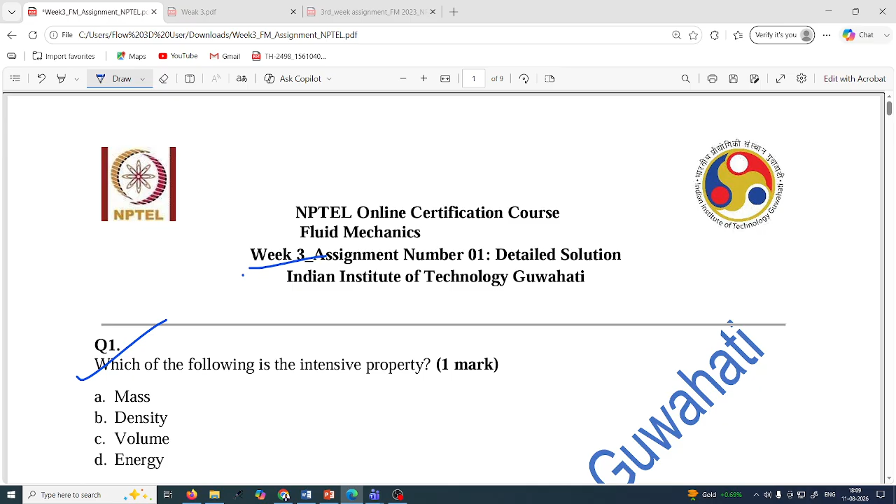So now let us move with the week 3. Question 1 is, which of the following is an intensive property? Option A: mass, density, volume and energy. So you have 4 options. Please just try to write your answer in the chat box.

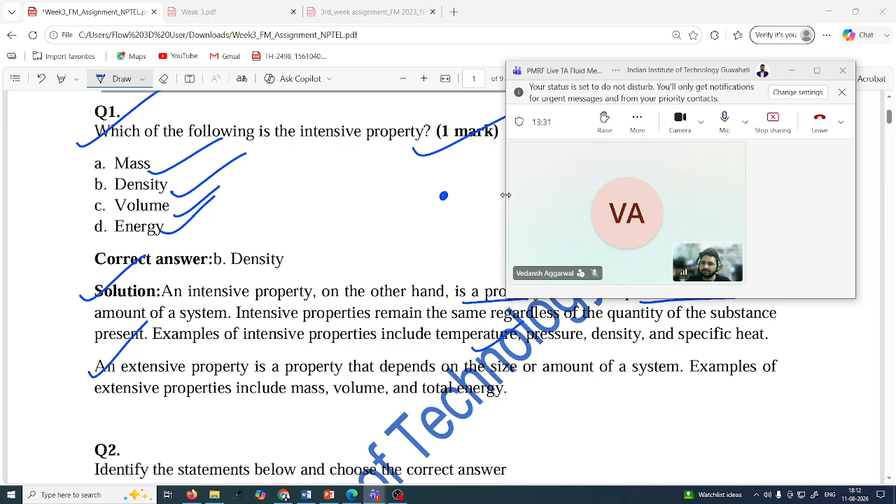Yes, so the next question is for 1 mark. Identify the statement below and choose the correct answer. Here you have two statements. Statement A: Reynolds transport theorem provides a link between system approach and control volume approach. Statement B: a control volume focuses on a region of space.

So here you have the code: Option A, A and B are true. Option B, A is false and B is true. Option C, A and B are false. Option D, none of them. So you have four options. Please just try to understand the question, read very carefully, and try to write your answer in the chat box.

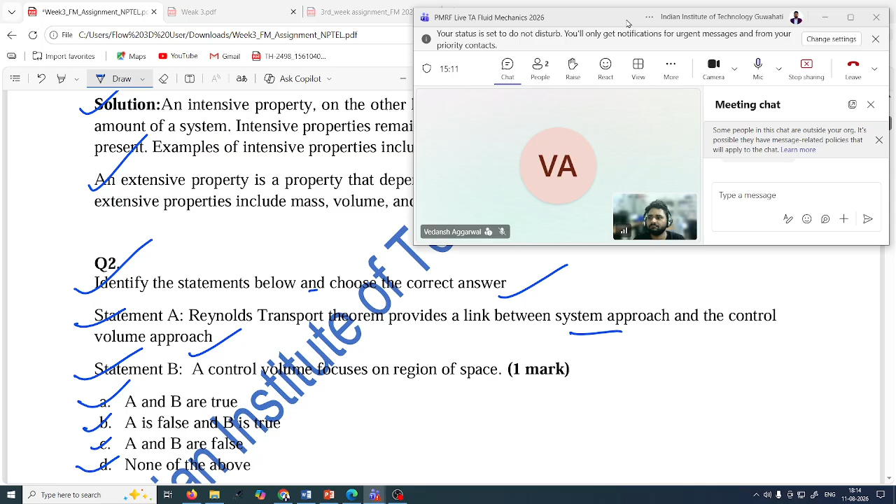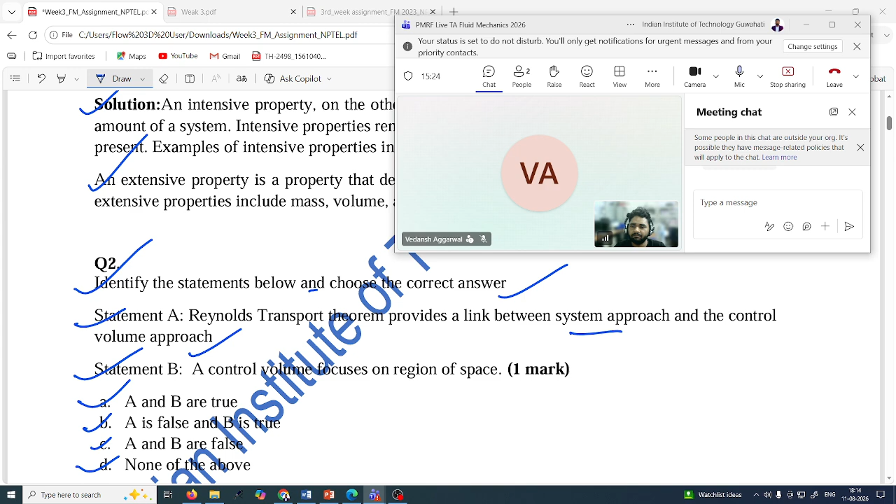Okay, okay, it is not visible. No, it might be visible. Oh, why it is not? Let me just open the chat. Just type again, please, let me just see. Just type, what is the problem? The problem should not be like that. Just type, please.

Have you typed or not? Oh, but it is not visible from my side. Okay, okay, that's fine, but I am just checking why it is not visible, because this is maybe a technical error issue, so I'll just... yeah, it is visible, I think when I am typing it is visible. Oh, your option is also visible.

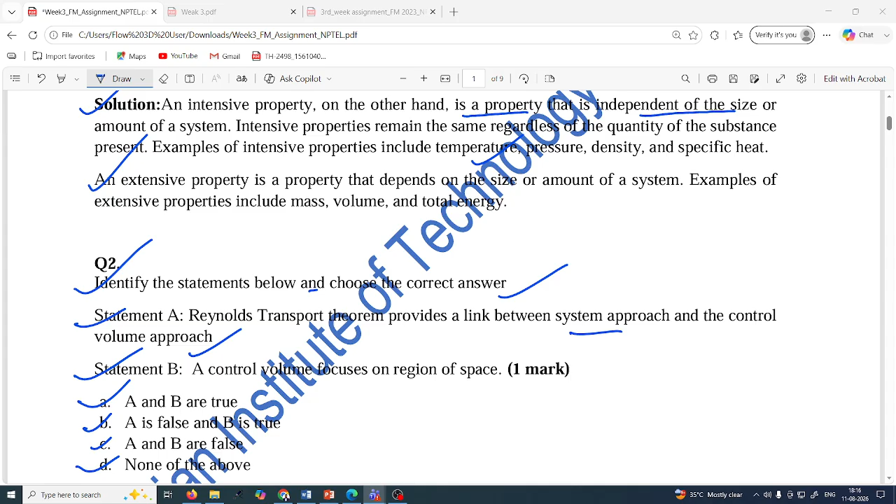A and B are true. It is visible, hope I think you are able to see now. A and B are true. Okay, okay, so actually I have two screens, one for the question and another for this link. Okay, so yes, option A is correct. That is good.

So what is actually the Reynolds transport theorem? It provides the necessary link between the system approach of following a set of particles and the control volume approach, analyzing the flow through a defined region of space.

Additionally, a control volume does focus on a specific region of space where the flow can flow in and out. So I want to explain a little bit about the control volume approach versus the system approach. The system approach means the Lagrangian approach. Let me explain with a simple example of a river.

If you are going to measure the flow velocity in the river, you have two devices. One is a floating device for velocity measurement, and another is a fixed one, meaning this device can be fixed at a place and you can measure the velocity.

When you measure fluid velocity using the system approach, you are tracking a set of particles, the same particle, wherever it reaches. When you put your floating device in, it will flow with the fluid velocity, keeping in touch with the same fluid particle. As water flows downstream, your floating device flows downstream too. This means you are measuring velocity using the system approach.

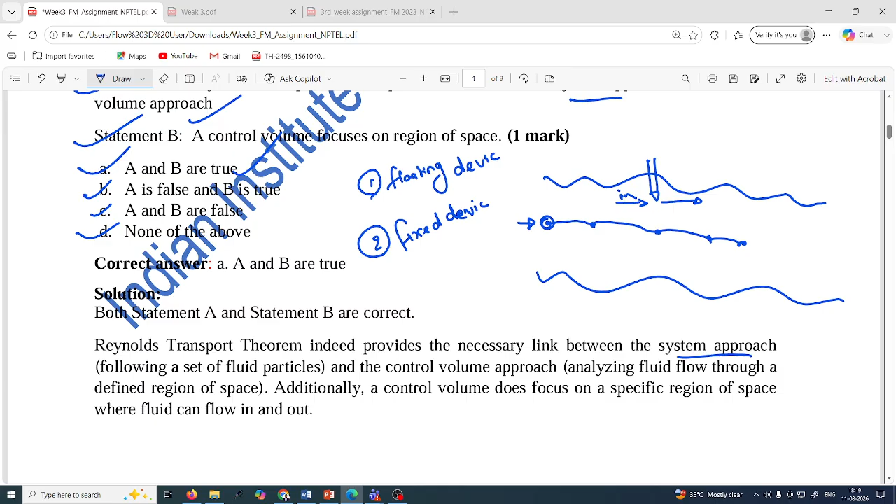This is a very conceptual question, so remember it, please, because based on this concept you can get questions in the final NPTEL exam or your assignment. Now let us move on to question number 3.

Question number 3 is: identify the statement below.

Hello, Rajkumar, yes, no, I think Rajkumar has opened... just please unmute, please mute your voice, Rajkumar. Just mute your mic, please. I think let me... yes, I am able to. Okay, I have muted the mic of Rajkumar.

Now let us move on to the question. Question 3 is: identify the statement below and choose the correct answer. Statement A: a control volume focuses on a set of fluid particles. Statement B: a control volume can be fixed, movable, or deformable. So you have these options.

Please try to write your answer in the chat box for question number 3. So for question number 3, you are telling option A is false and B is true. Okay, let me just see.

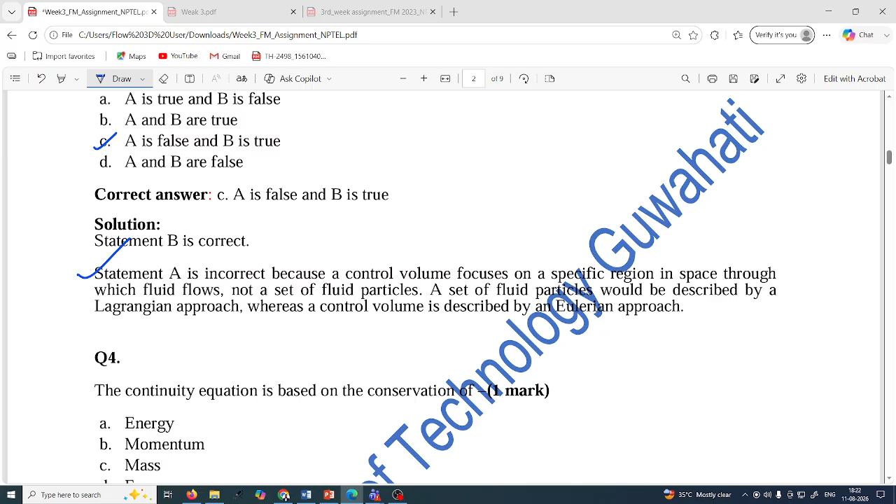Now let us move on to the next question, question number 4. The continuity equation is based on the conservation of energy, momentum, mass, and force.

This is a very easy question, but I need the answer from your side, please. Everyone please write your answer in the chat box: the continuity equation is based on the conservation of whether it is energy, momentum, mass, or force. Okay, you are telling mass will be correct. I will not take much time here; that will be mass.

So the explanation: the continuity equation is based on the conservation of mass, which is a fundamental principle in physics, stating that mass cannot be created nor destroyed within a closed system. The continuity equation is particularly important in fluid dynamics and describes how the mass of the fluid remains constant as it flows through a given volume. I hope you understand. Now let us move on to the next question.

This one is a little bit calculative. Question 5: water enters a nozzle with a velocity of 5 meters per second and exits with a velocity of 15 meters per second, remember 3 times more. The mass flow rate of the water is 10 kg per second. What is the force exerted by the water on the nozzle? So here you need to calculate the force exerted by water on the nozzle.

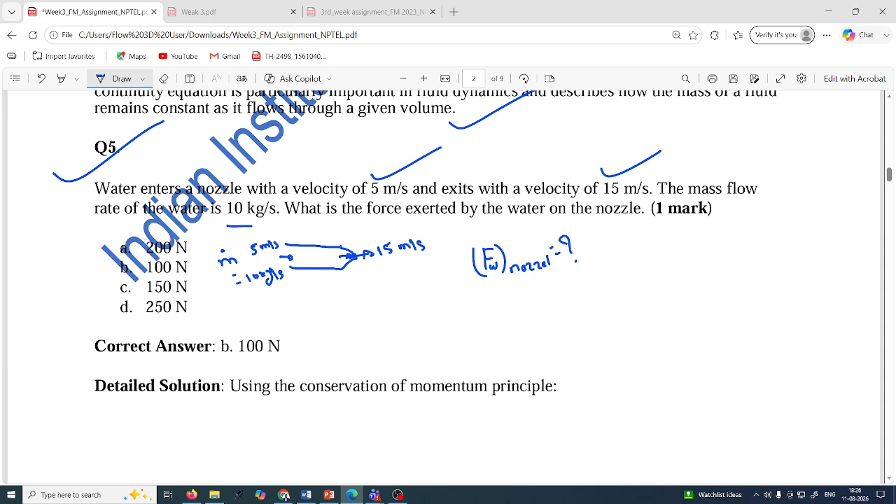Now very simple one, that will be 100 Newton. So you are correct. Using the conservation of momentum principle, the force is equal to the rate of mass into V2 minus V1. So this will be 10 into, sorry, not 20, the value is 15 and 5. So 15 minus 5, 10 into 10, finally 100 Newton. So very easy question, but conceptual. Remember please.

Now let us move on to question number 6. Consider a steady incompressible flow through a converging nozzle. If the cross-sectional area at the inlet is A1 and outlet is A2, with A2 less than A1, and the velocity at the inlet is V1, what is the velocity at outlet V2? Remember, the condition given is steady incompressible flow. Please just try to write your answer, which option will be correct: A, B, C or D.

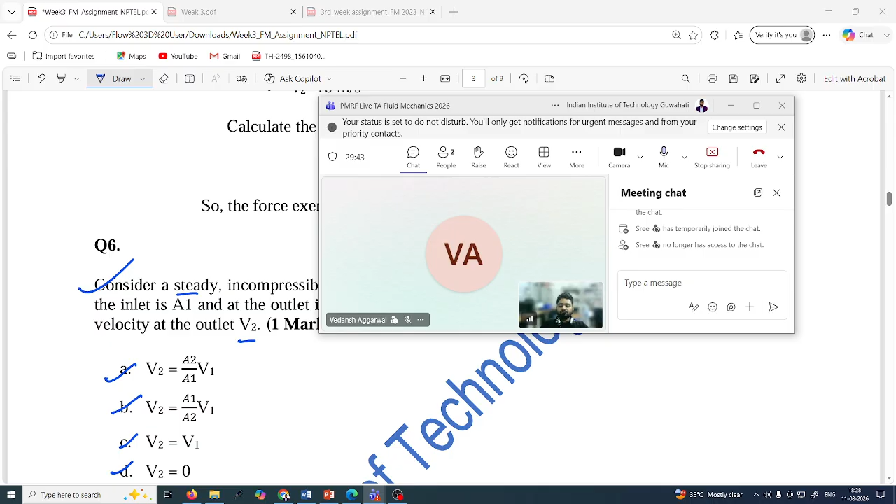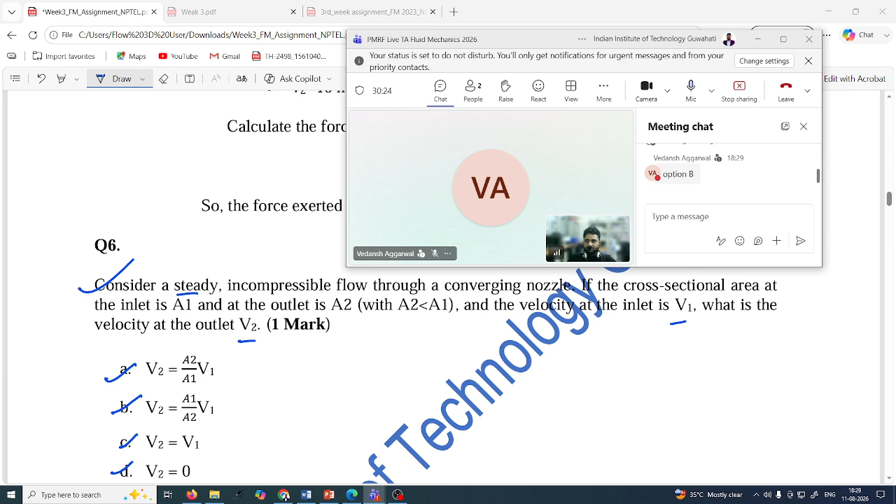Very simple one, just think about it. Okay, you are telling option B is correct: V2 is equal to A1 by A2 into V1. Vedansh is also telling option B is correct. Okay, let me just check whether B is correct or not.

Here definitely you have to apply conservation of mass. A1 V1 is equal to A2 V2. Why are we applying this? Because the flow is incompressible. Steady flow incompressible means what? If the flow is incompressible, your density will be constant. If that flow was compressible, then you need to write rho 1 and rho 2 also. But this is incompressible, so both will be constant and cancel out.

The question is asking what is the velocity at outlet V2. So V2 is A1 by A2 into V1. This will be the correct one. Very simple, but you need to know the concept of what compressible means, what steady means. You have to understand the three-dimensional continuity equations also, with steady and unsteady. So remember that equation, it will definitely help you a lot. So option B is correct for question number 6.

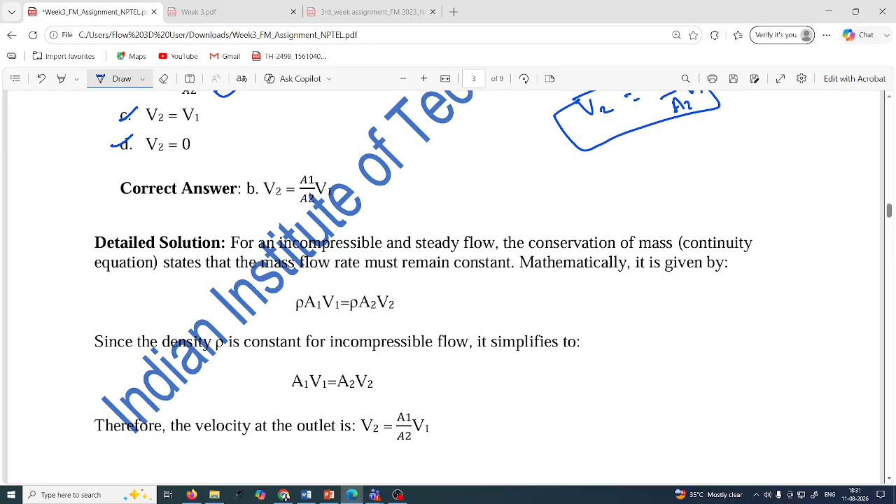Now let us move on to the next one. Here the explanation is slightly given, so I'll read for you. What is the detailed solution? For an incompressible and steady flow, the conservation of mass continuity equation states that the mass flow rate must remain constant. Mathematically, it is given by rho 1 A1 V1 equals rho 2 A2 V2. Since density is constant for incompressible flow, it simplifies and you can very easily write it like that.

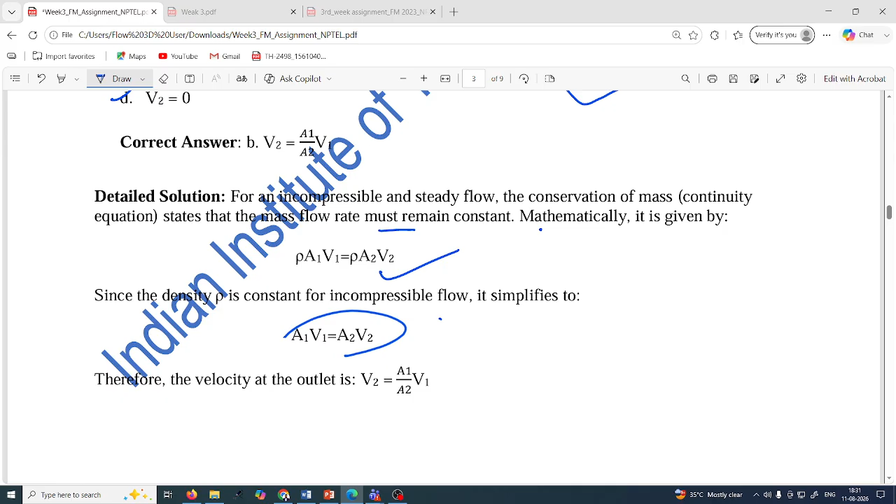Now let us move on to question number 7. Which term in the Reynolds transport theorem represents the net flux of a quantity across the control surface? Remember please, the question is asking about the net flux of a quantity across the control surface. The options are: local derivative term, convective term, source term, dissipation term. Which will be the correct one?

If you have seen the lecture very carefully, then you can give the answer easily. Otherwise it will be very difficult. I'll give you 1 or 2 minutes. If you don't know, you can Google it, so you will remember for a long time. Otherwise just think, try to recall your concept, and write your answer please.

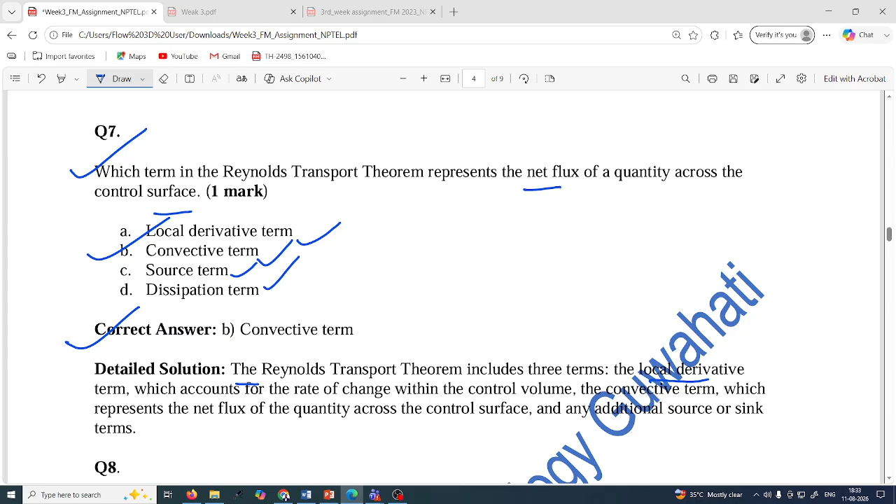Let me just read the detailed solution. The Reynolds transport theorem includes three terms. One is the local derivative term, which accounts for the rate of change within the control volume. The convective term represents the net flux of the quantity across the control surface, and there's an additional source or sink term. Remember this very basic understanding.

Now let us move on to the next question, question number 8. In the context of Reynolds transport theorem, which of the following statements is most appropriate?

Option A, it uses fixed control volume. Option B, it does not use control volume approach. Option C, it links system and control volume approach. Option D, it uses deforming control volume.

Just try to understand how sir derived this in the recording class, and write your answer in the chat box. Very conceptual question. If you have gone through the derivation, then definitely you will be able to give the answer. Please just write your answer.

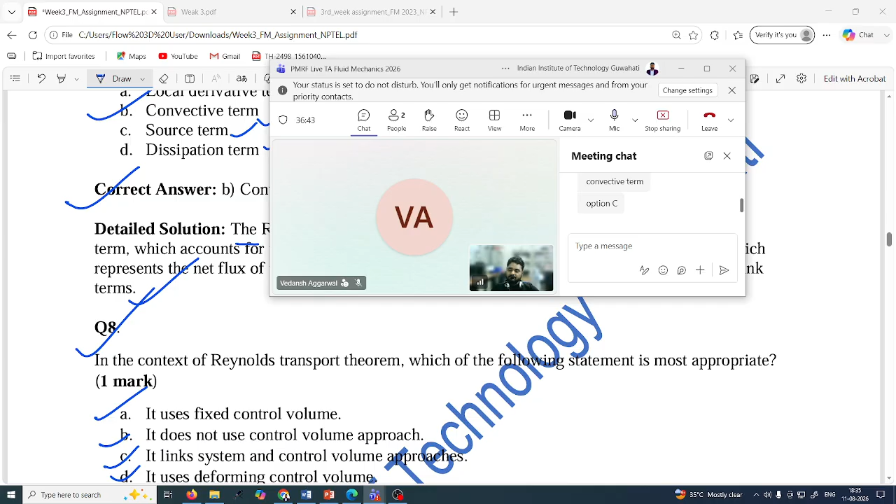So you are telling option C is correct for this, right? For question number 8, option C, it links system and control volume approach. Yes, definitely it is correct, as we have seen in the previous questions also, maybe the first or second question.

So the detailed solution: Reynolds transport theorem gives the relation between the system equation - that is option C here is correct - the system equation and the corresponding control volume equation, which relates the change in extensive property of the system and control volume.

Let us move on to the next question, question number 9. This question you need to read very carefully. Let B denote a property of a fluid.

The statement of Reynolds transport theorem is: the instantaneous total change of B inside the [fill the blank] is equal to the instantaneous total change of B within the [fill the blank], plus the net flow of B into and out of the [fill the blank]. You have 3 blanks to fill here.

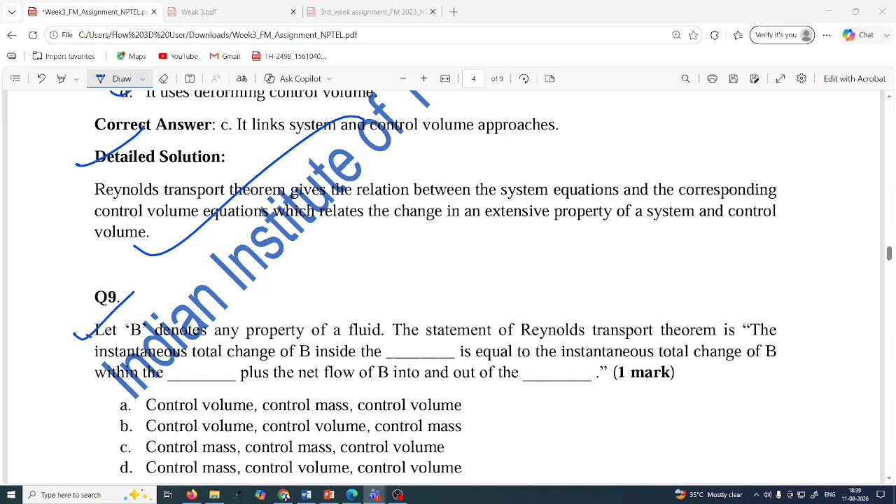The D meaning is this. Let me just check the answer, whether you are correct or not. Yes, option D is correct. So remember, you can fill in the blanks like that: control mass, control volume, and control volume.

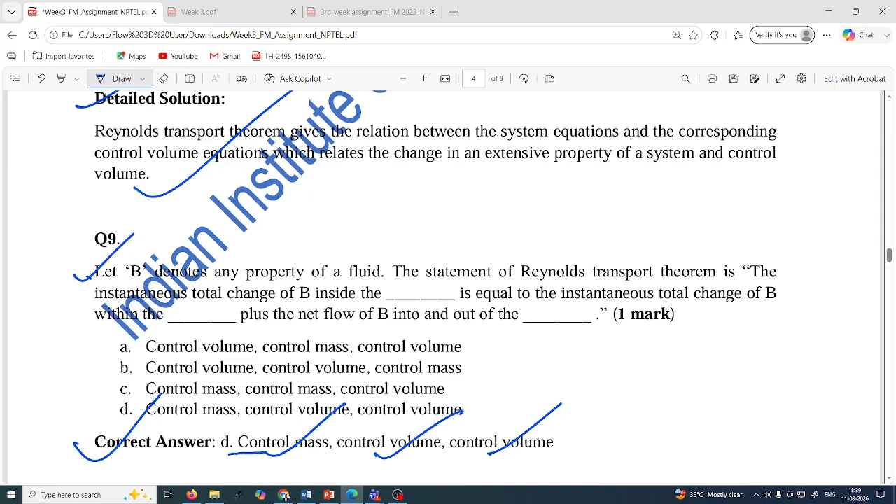So here the detailed solution is given. Let me just read it: Reynolds transport theorem states that the instantaneous total change of B inside the control mass is equal to the instantaneous total change of B within the control volume plus the net flow of B into and out of the control volume. So this is correct.

Now let us move on to the next one, question number 10. Let momentum be one of the extensive properties B of the fluid flowing through a nozzle. The corresponding intensive property beta of the fluid will be: mass, velocity, acceleration, or density. Which option will be correct?

Remember please, here just think: you have momentum as the extensive property which depends on mass, the fluid flowing through a nozzle. The corresponding intensive property does not depend on mass or the shape of the body. So what will be the intensive property? That's the question. First you have to think what is B and how we will calculate beta. This is also important.

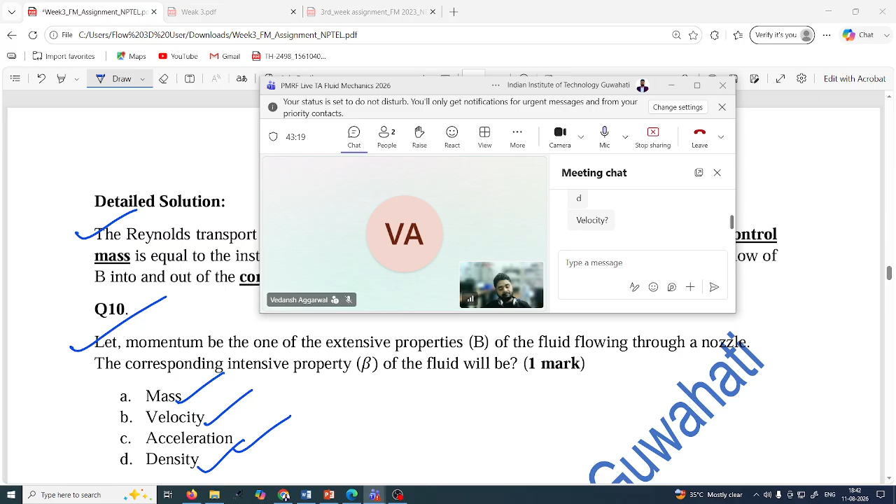How is option B correct? Let me explain. So momentum means what? Momentum here is represented by B, so it is nothing but mass into velocity. And what is beta? Beta is which does not depend on mass, so you need to divide this extensive property with the mass. So mv divided by m is nothing but v, means velocity. So your velocity will be the correct answer.

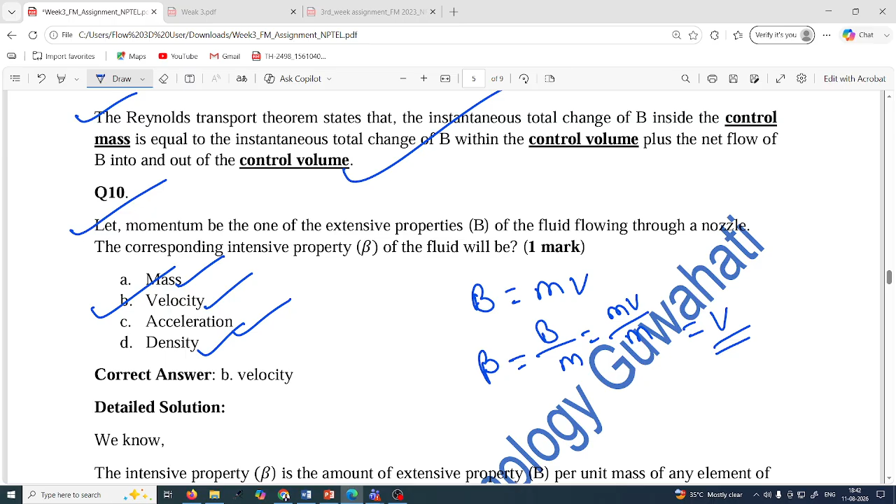Hope you understand. So the detailed solution is, let me just, okay, here the explanation is given, very long explanation, so I will not go into detail. So this is the basic fundamental what I have explained.

So now this is a 2 marks question, so you have to read very carefully the question. Consider the below figure. Let me just show you the figure also.

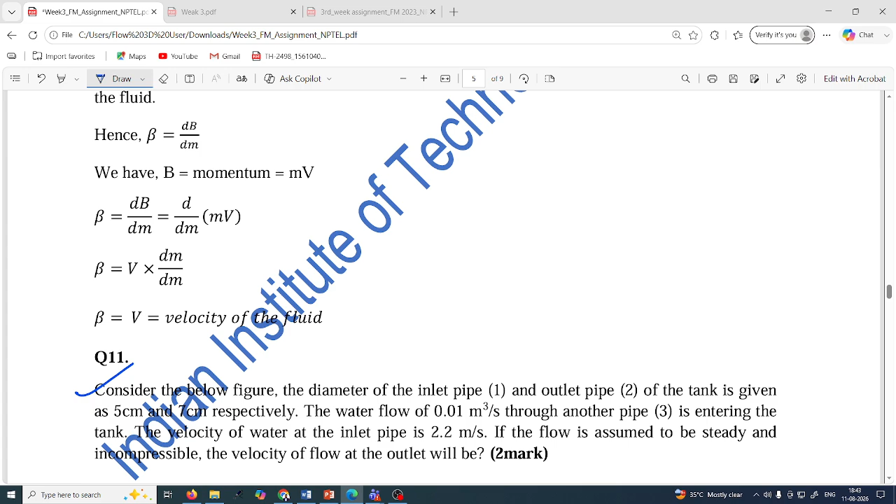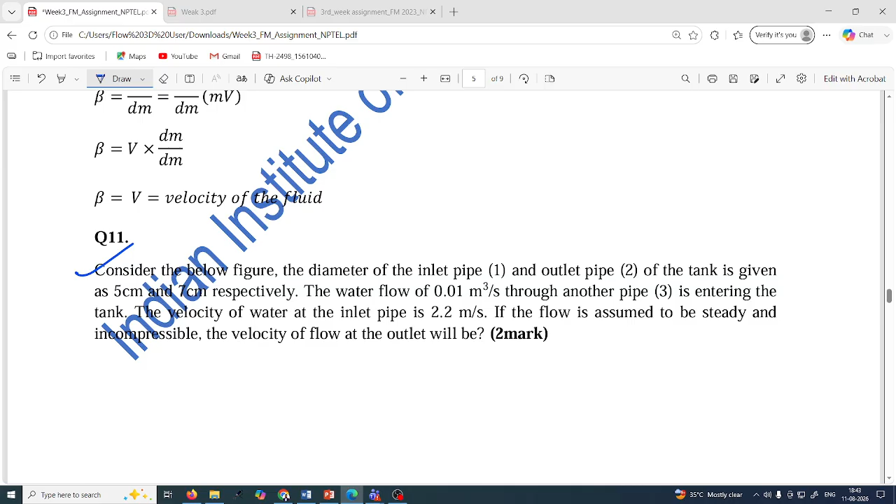Oh, where is the figure? Oh, this is the figure. So anyway, I'll show you the figure in the last. So consider the below figure, or I can reduce the size so you can see.

Okay, now it is visible. So consider the below figure. The diameter of the inlet pipe 1 and outlet pipe 2. Here is inlet pipe 1 and outlet pipe 2 of the tank given 5 centimeter and 7 centimeter respectively. The water flow of

0.01 meter cube per second through another pipe. From here you can see. Okay, pipe 3 is entering the tank. Okay, the velocity of water at the inlet pipe is 2.2.

If the flow is assumed to be steady and incompressible, the velocity of flow at the outlet will be - very simple question. So but you need to understand the thing. So just try to write your answer please.

In the chat box you have 3-4 minutes for the calculation also. So please, I'll recommend you just try to calculate if you are looking, because here I have not joined the many students. So if you are looking this video after the recording on YouTube, you just pause the video and try to solve by yourself. Very simple question because this is. So just try to write your answer who have joined here. So I'll give you 2-3 minutes, or you can take 5 minutes also if you are not able to solve within short period. So I am waiting please.

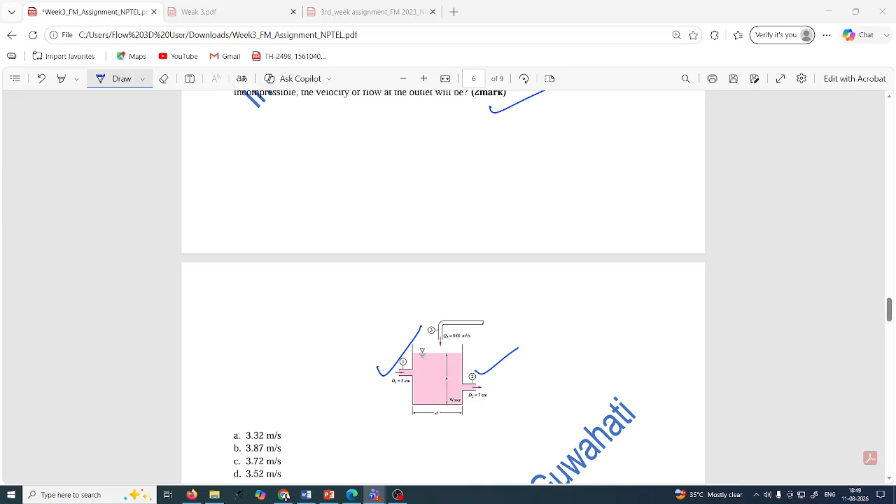Okay, so you are telling 3.72 meter per second. So let me just show you the answer. So okay, option here is 3.32, 3.87, 3.72, and option D is 3 point. Well, let me just give you a bigger one. Yes, 3.52. So your answer is 3.72, which is option C is correct, and you are also telling, so you are correct. How? As you know, the discharge.

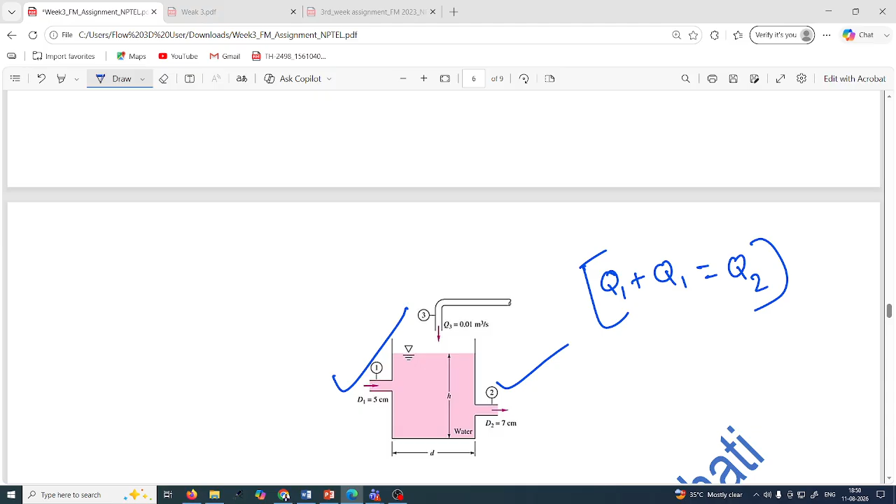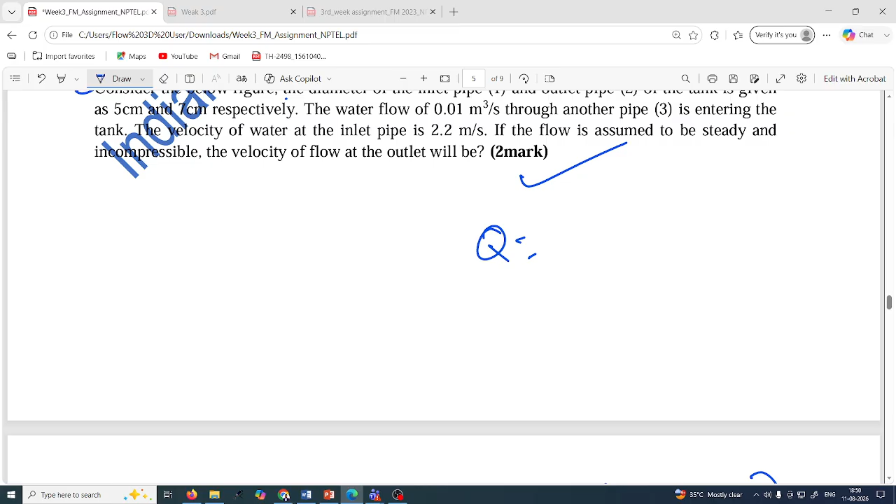So inflow is how much? Your Q1 plus Q3 is in, and out is Q2. So this is a simple concept here. Now what is the question asking? Question is asking the velocity of flow at the outlet, what will be? So, discharge is what? Area into velocity. So velocity is discharge by area. And what is area? Area is pi by 4 d square. So this is area. Now, so discharge is what?

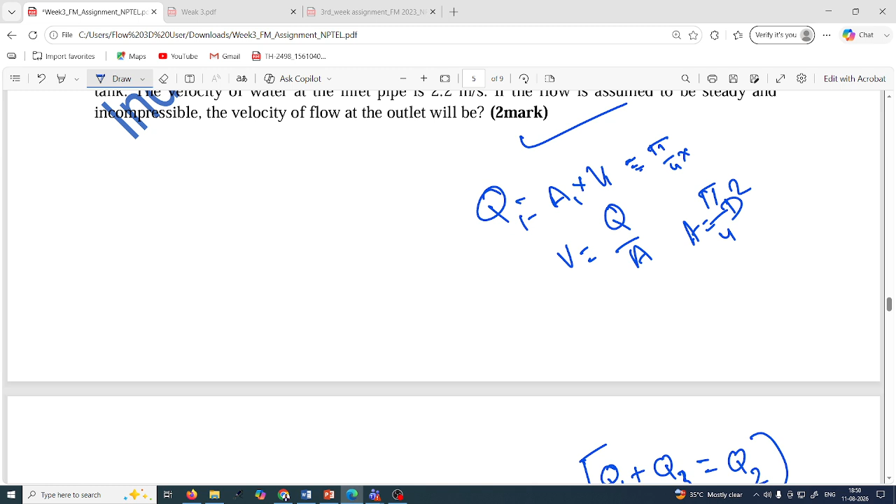So Q3 is given, which is 0.01. And what about Q1? Inlet pipe velocity is given as 2.2. If inlet pipe velocity you have, area is pi by 4 into d square. So what will be the d? D is nothing but 5 centimeters. So you can put in meters, 0.05 meter square into velocity 2.2. So from here you will get Q1.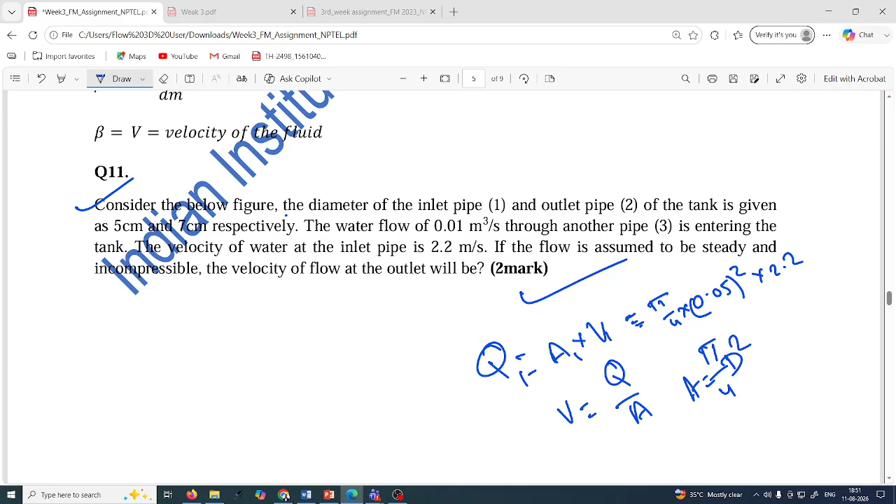So you can put here the Q1 value, and after adding you will get Q2. Very simple. Once you get Q2, it is nothing but area into velocity, A2 V2, and V2 will be Q2 by A2. So very simple, just the balance of discharge. So we'll get V2 is equal to 3.72.

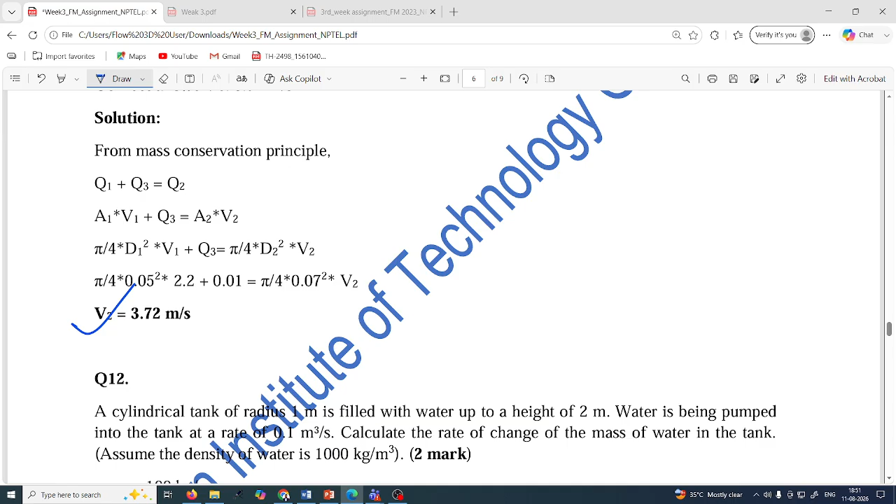Now let us move on to the next one, question number 12. A cylindrical tank of radius 1 meter is filled with water up to a height of 2 meters. Water is being pumped into the tank at the rate of 0.1 meter cube per second. Calculate the rate of change of mass of water in the tank. Assume the density of water is 1000 kg per meter cube. Please try to calculate this question. You have 5 minutes for this question, no issue.

Okay, you are telling option A, 100 kg per second. Okay.

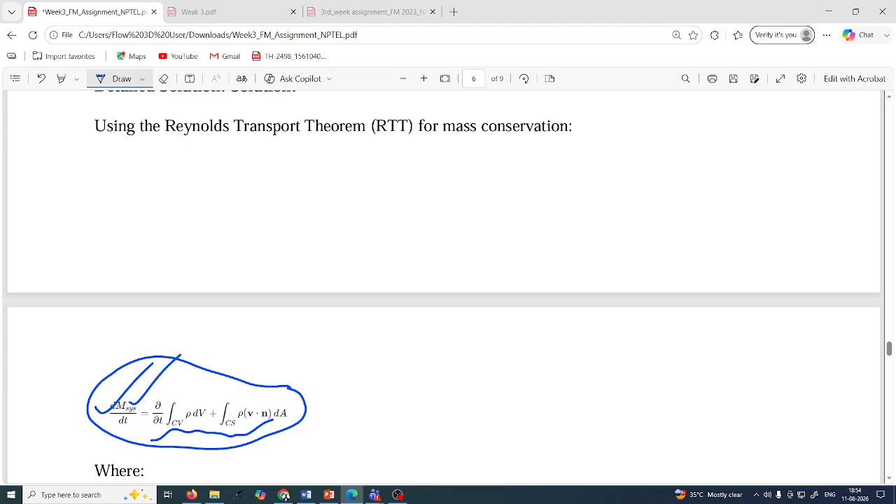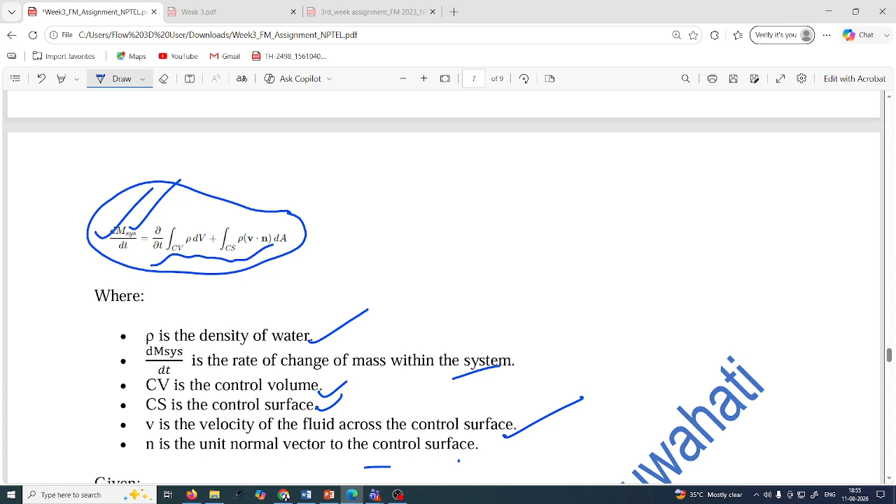Now the question is very easy, no issue. Here rho is the density of water, dm system by dt is the rate of change of mass within the system, and what is the question asking? The question is asking the same thing, calculate the rate of change of mass of water in the tank, or you can say in the system. CV is control volume and CS is your control surface. Now V here is the velocity of the fluid across the control surface, and n is the unit normal vector to the control surface.

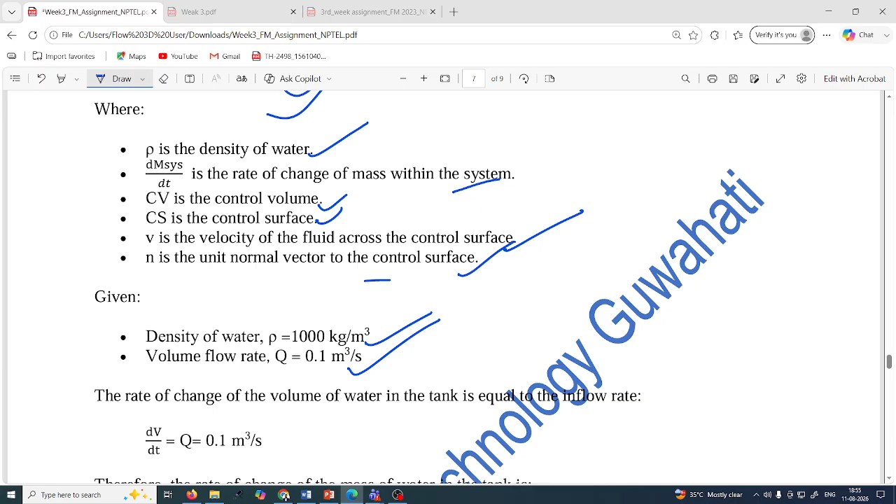So these are the details about this equation. Now let me show you the answer. In the question, two things are given: density of water and the volume flow rate, or you can say the discharge, given as 0.1 meter cube per second. So you can write very easily, discharge is volume by time. So change in volume with respect to change in time is given as 0.1 meter cube per second, because the question tells you that water is pumped into the tank at the rate of 0.1 meter cube per second. So directly in the question it is given del v by del t is 0.1, meaning at 1 second you are putting in 0.1 meter cube, at the next second you are putting in another 0.1, cumulative 0.2 meter cube, then 0.3, then 0.4 meter cube. So 0.1 meter cube is increasing as time increases, 3 second, 4 second, like that. That's why it is del v by del t.

Now therefore the rate of change of mass in the water tank is rho del v by del t. So you can get very easily 1000 into 0.1, equals 100 kg per second. So this is the simple explanation for question number 12.

Now let us move on to question number 13. A cylindrical tank with a diameter of 2 meters is being filled with water from a pipe with a flow rate of 0.1 meter cube per second. How long will it take to fill the tank to a height of 3 meters?

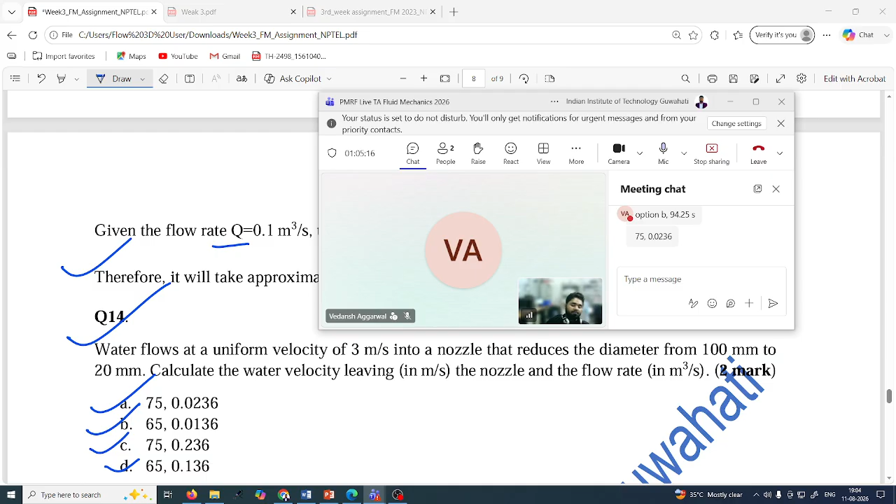Okay, already solved. So you are telling 75 and 0.0236, meaning you are telling option A. Here option A is correct.

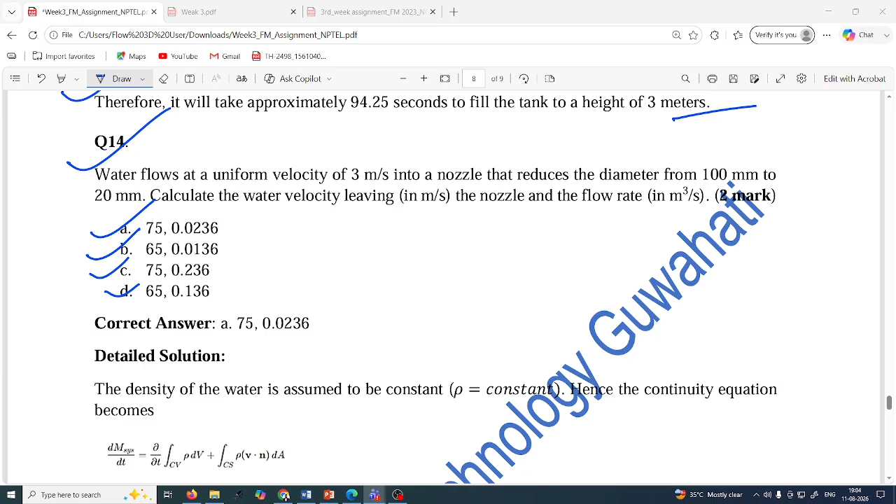Yes, let me just show you the answer or detailed solution. Here you can see, the density of water is assumed to be constant, so rho equals constant. Hence the continuity equation becomes rho A1 V1 equals rho A2 V2. From here you can calculate V2 very easily, which is 75 meter per second, as we have solved previously. Now you can calculate discharge also, A1 V1, very easily. A bit calculative, but we have solved this type of question before - the derivation, not exactly this numerical, but we know these concepts from previous questions.

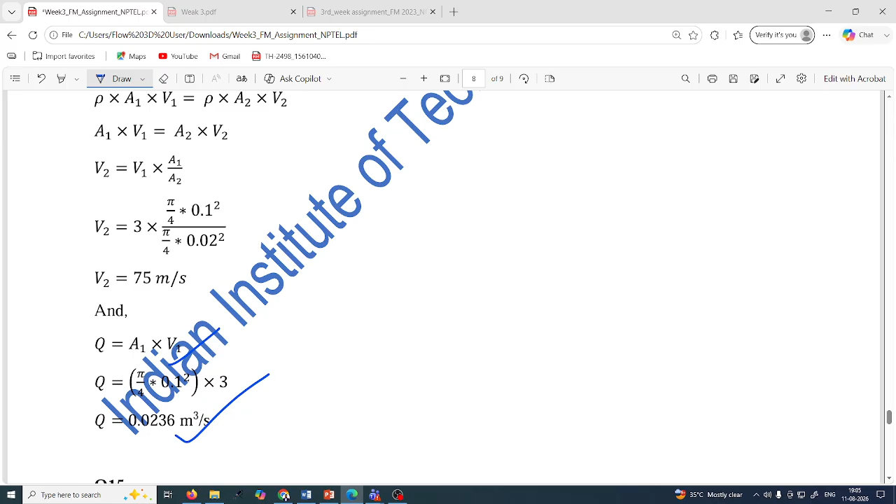So now next question is question number 15, the last question for this set. We have another set also.

Question number 15: water flows in and out of a device as shown in the figure. Calculate the rate of change of mass of water, dm by dt, in the device. Options are given, so please try to calculate your answer and write it in the chat box. Very easy question, but you have to understand it slightly.

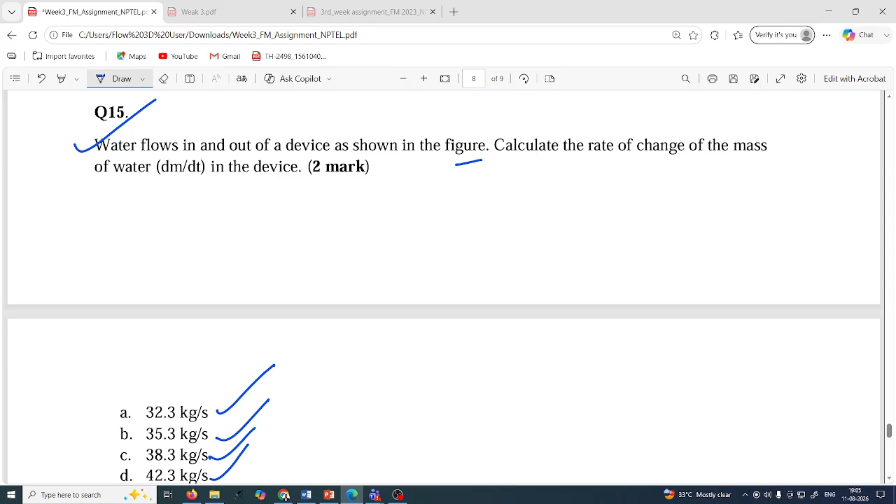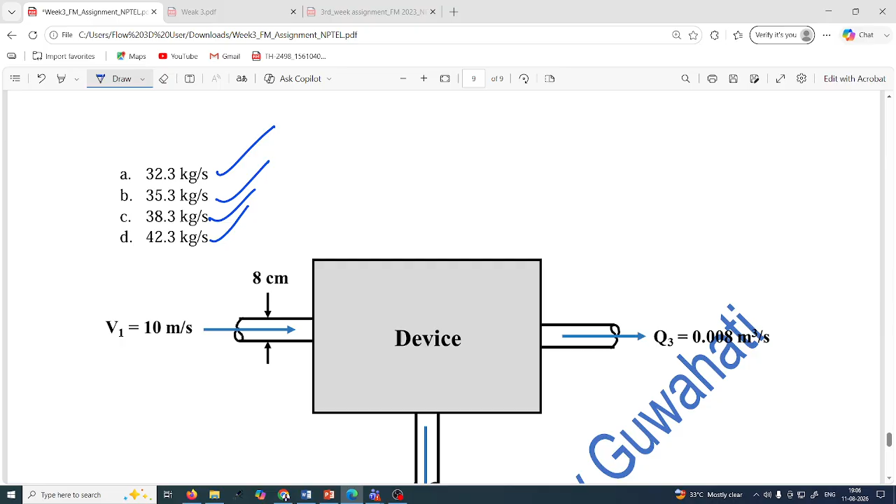I think here is the device. Let me just reduce it so you will be able to see it better. Yes, so here you can see that. So here you have to calculate - let me just show you the question. Water flows in and out of the device shown in the figure. Calculate the rate of change of mass, dm by dt. Here you need to calculate dm by dt.

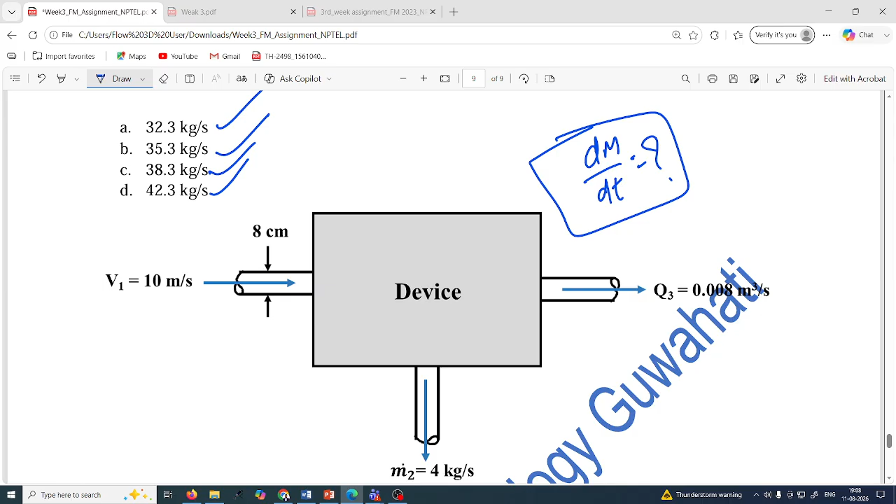So the question is asking for the rate of change of mass of water in the device. Now here the explanation is given, I will show you - yes, you are correct. Option C is correct. So the detailed solution, we'll see very carefully.

The continuity equation with three surfaces across which water flows takes the following form: 0 equals the control volume, and here the control surface, as we have discussed above.

So this is 0 equals dm/dt minus rho1 a1 v1 plus rho2 a2 v2 plus rho3 a3 v3. Why? Because you have three, one inlet and two outlets. Assume the density is constant over the volume, and we use vn equal to minus v1, since n-cap1 points out of the volume, opposite to the direction of v1. The information given is rho1 a1 v1, and m2 is already given because you need to calculate the rate of change of mass, so you need to write everything in terms of the given data.

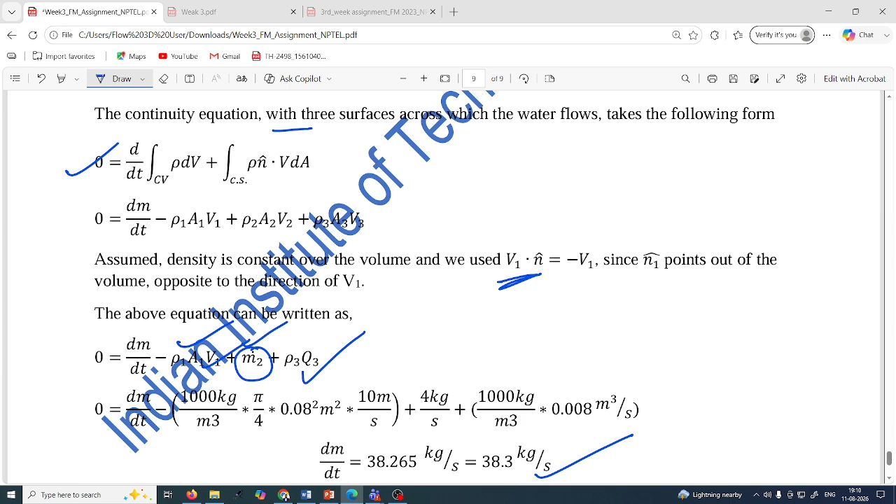This is also rate of change of mass. So here you can see very clearly, and when you put in all the values, you will get the answer easily, no issue. So now hope you understand this.

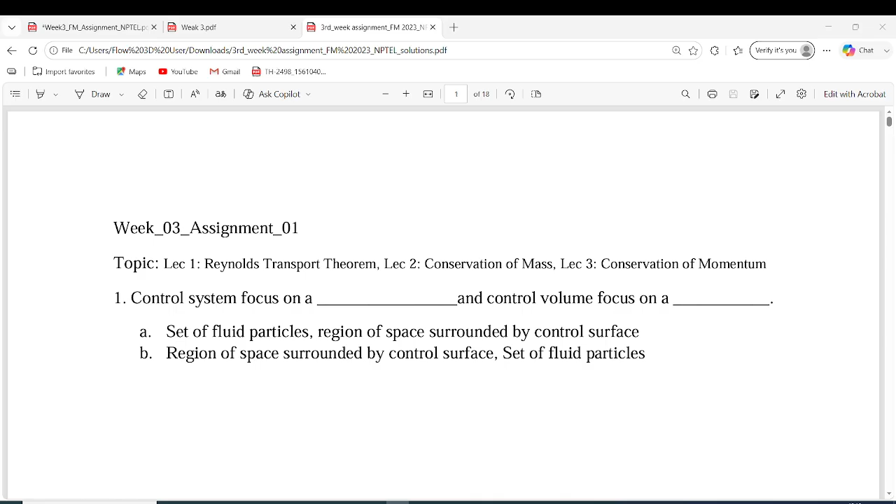Okay, so now let us solve the question. Question 1: control system focuses on filling the blanks, and control volume focuses on filling the blanks. Option A: set of fluid particles, a region of space surrounded by control surface. Option B: a region of space surrounded by control surface, and set of fluid particles.

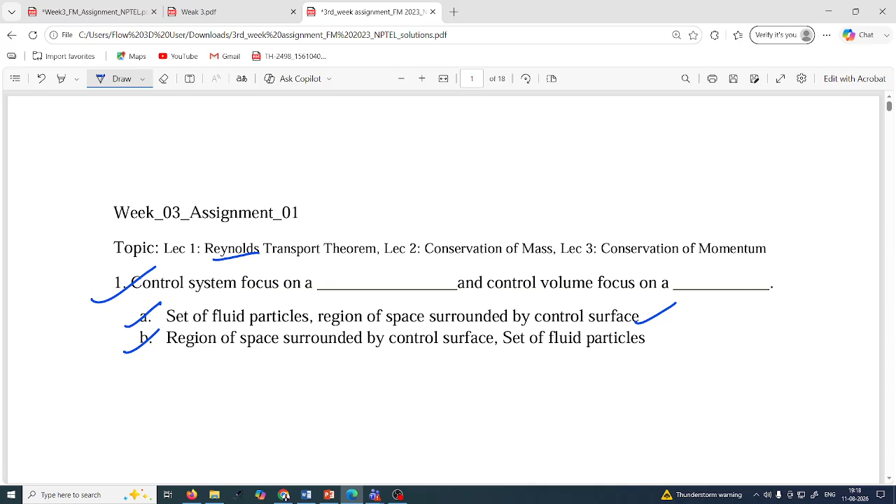Which will be correct for question number 1? You are telling option A. So control system focuses on the set of fluid particles, yes that is correct. Control volume focuses on a region of space surrounded by control surface, as we have discussed a lot. You can see here how from the basic concept the question is framed in a different way. Similar type of questions, not exactly the same, but based on this concept you will get questions in coming assignments or the NPTEL exam. In week 3 your lecture focuses on Reynolds transport theorem, that's why we are discussing it a lot, along with conservation of mass and conservation of momentum. These are the 3 lectures. So yes, option A is correct: control system focuses on a set of fluid particles, control volume focuses on a region of space surrounded by control surface.

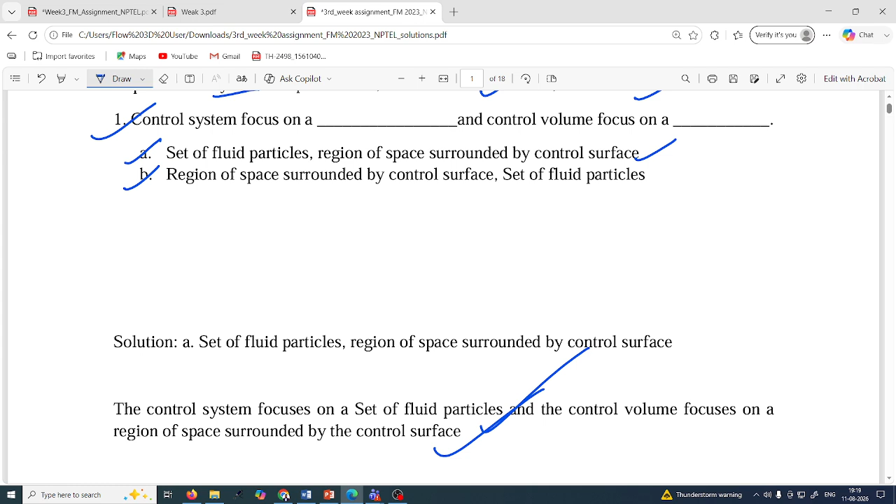Now let us move to the next one. Control volume may be fixed, movable, deformable, or all of the above. Please write your answer in the chat box for question number 2. You are telling all of the above, meaning option D is correct, as we have discussed in the previous set also.

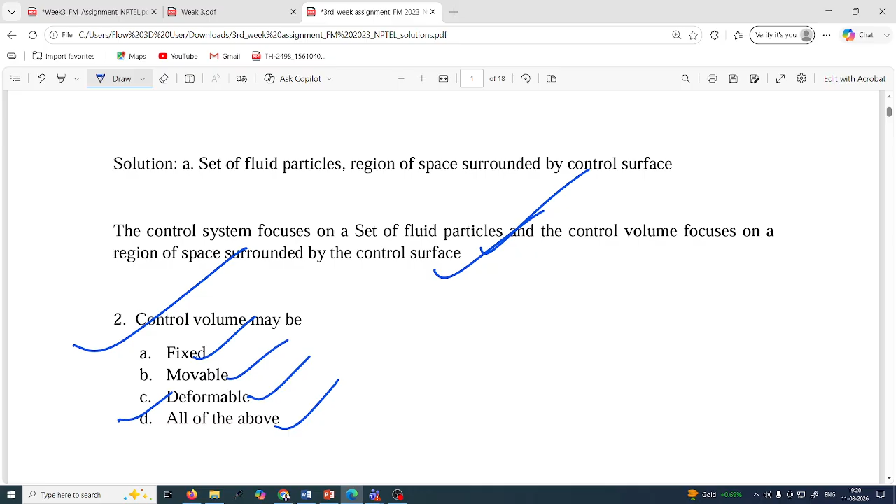Now question number 3: extensive property and intensive property. Option A: independent of mass and proportional to amount of mass. Option B: proportional to amount of mass and independent of mass. Choose which option is correct. As we've discussed a lot, if you recall your concept you'll get the answer. You are telling option B: extensive property is proportional to amount of mass, and intensive property is independent of mass. Yes, definitely, as we have solved in the numerical also.

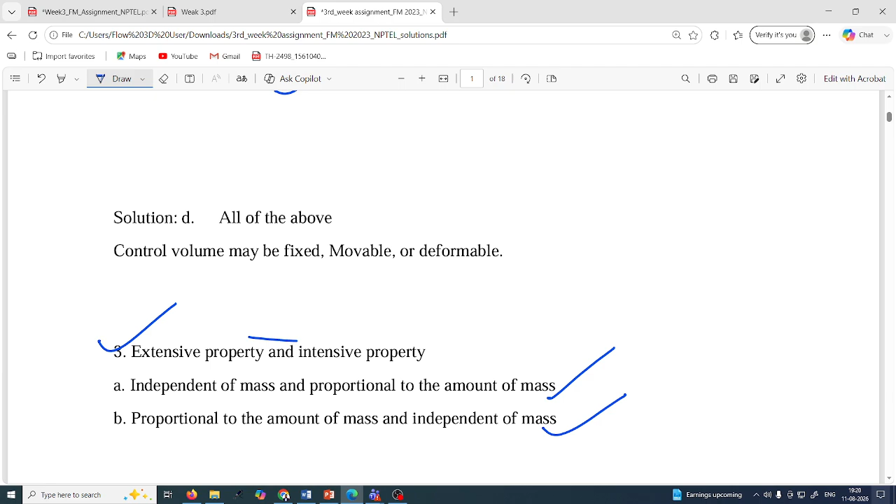So yes, definitely, extensive property is a property that depends on the size or amount of a system; examples include mass, volume, total energy. Intensive property, on the other hand, is independent of size or amount of the system, and remains the same regardless of the quantity of substance present. Examples of intensive property include temperature, pressure, density, specific heat, etc. So you can understand the question level.

The next question: the Reynolds transport theorem establishes the relation of physical equations between the system approach and control volume approach. True or false? You can imagine this question is a bit repetitive, because I think this is from a previous year, 2023 or 2024 question. Yes, definitely it is true.

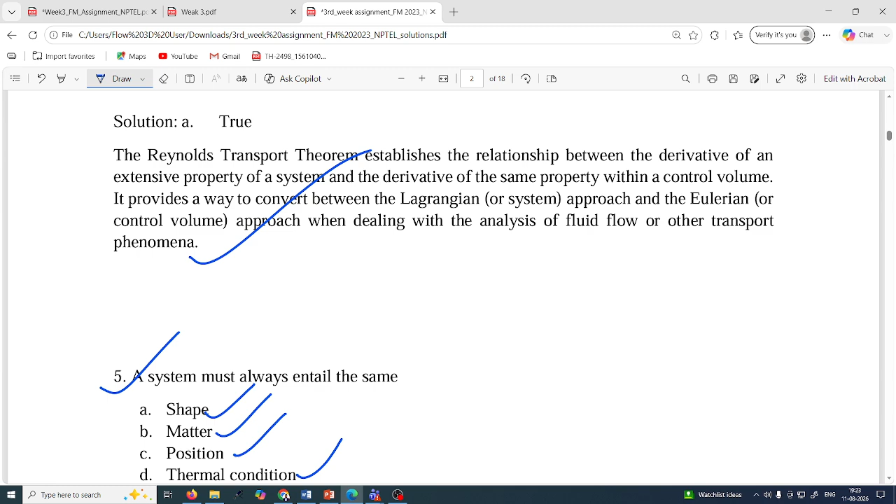So you are telling a system must always entail the same matter. This is correct. A system can change its shape, position, thermal condition, but must always entail the same matter. This is very important, meaning the set of fluid particles should not be changed. That is the meaning of this question.

Okay, I think we have seen this question before, so we'll not go over it again. Next question.

Question number 7. The momentum conservation principle is based on the physical principle of: zeroth law of thermodynamics, Newton's first law of motion, first law of thermodynamics, or Newton's second law of motion. Interesting and important question.

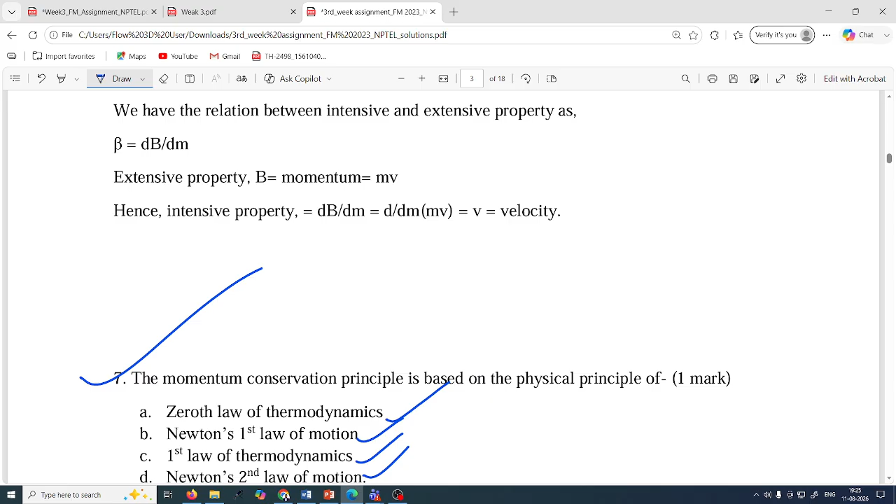Okay, you are telling option D, Newton's second law of motion. Yes, the momentum conservation principle is based on Newton's second law. Force equals mass times acceleration.

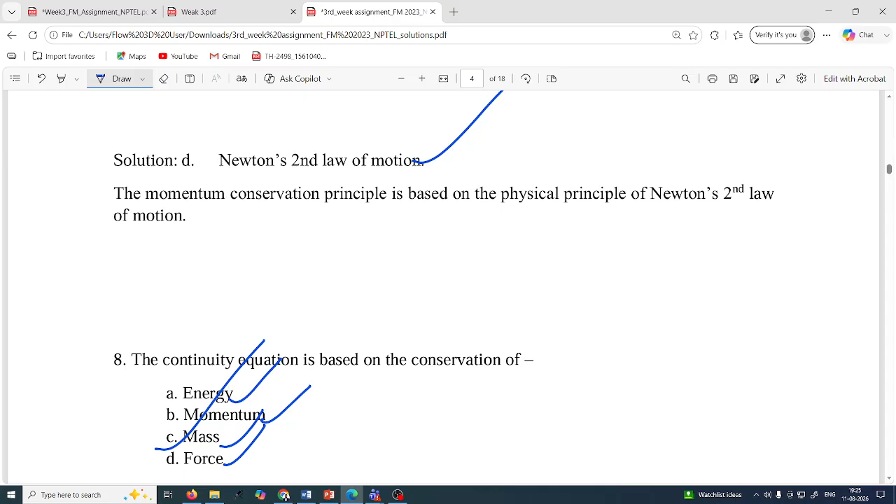Next question: the continuity equation is based on the conservation of energy, momentum, mass, or force. Similar question we have seen before, so mass will be correct, we'll not discuss much about this. Yes, so this is correct.

Question number 9: the continuity equation is valid for only compressible flow, only incompressible flow, both compressible and incompressible flow, or neither flow. Which option will be correct for question number 9? For question number 9, you are telling option C, both compressible and incompressible flow.

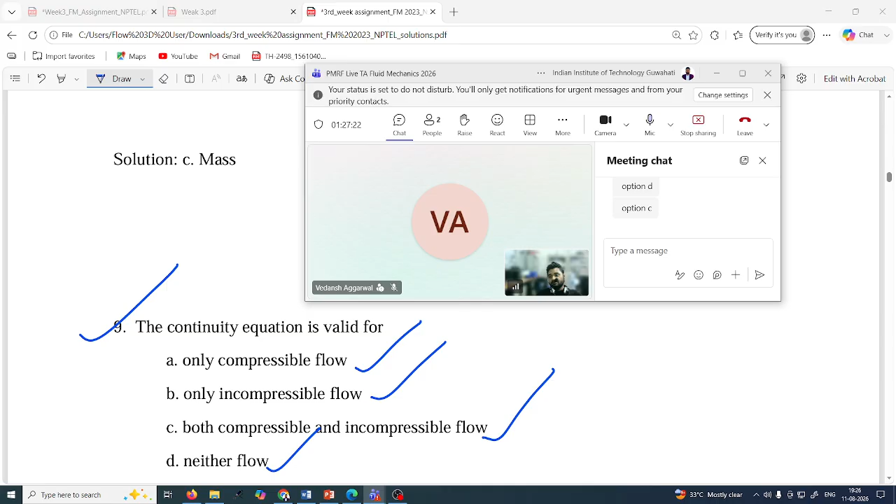Yes, it is correct, both compressible and incompressible flow.

Next question: a water jet strikes a stationary horizontal plate vertically at the rate of 18 kg per second with a velocity of 20 meter per second. The mass of the plate is 12 kg. Assume the water stream moves in the horizontal direction after the strike. The force needed to prevent the plate from moving vertically - you have 4 options.

Please just try to calculate. I'll encourage you to try to write and solve first, then write your answer - that will be a good idea. For question number 10, try to draw the diagram, so we will get more understanding. Remember, here the weight of the plate is also given. I am waiting, I'll give you 3 minutes, just try to calculate.

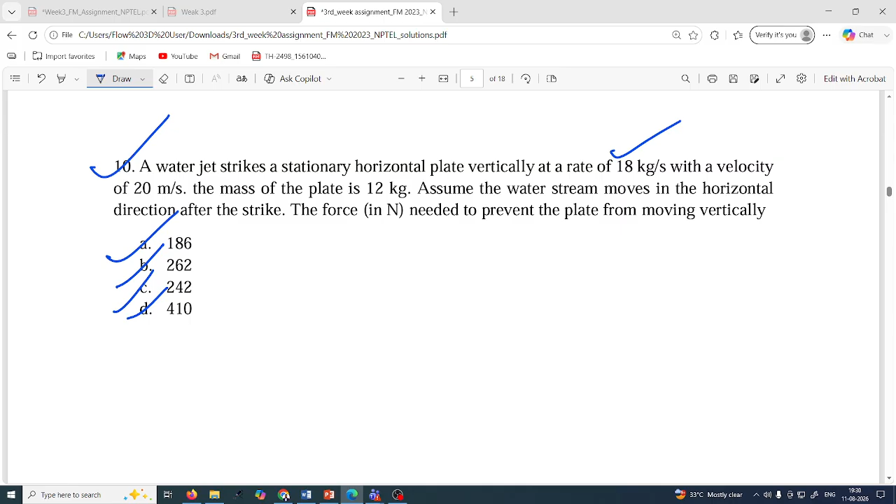Nice, so let me show you the answer, because here you have what? Yes, option C is correct, but here your water jet strikes with a mass flow rate of 18 kg per second, and also the mass of the plate is 12 kg. So whatever force is exerted by the 18 kg per second mass, that much force we require to protect, but additionally we have the 12 kg weight of the plate, so we need to reduce by that much amount.

So let us see how we will proceed for such type of questions - here it is explained very well. The force needed to prevent the plate from moving vertically is equal to the water jet force minus the weight of the plate. If mass of plate is 0 kg, remember, but here the mass is 12 kg given. So the force needed to prevent the plate from moving vertically is the water jet force minus the mass of the plate, that is 12 kg into 9.81.

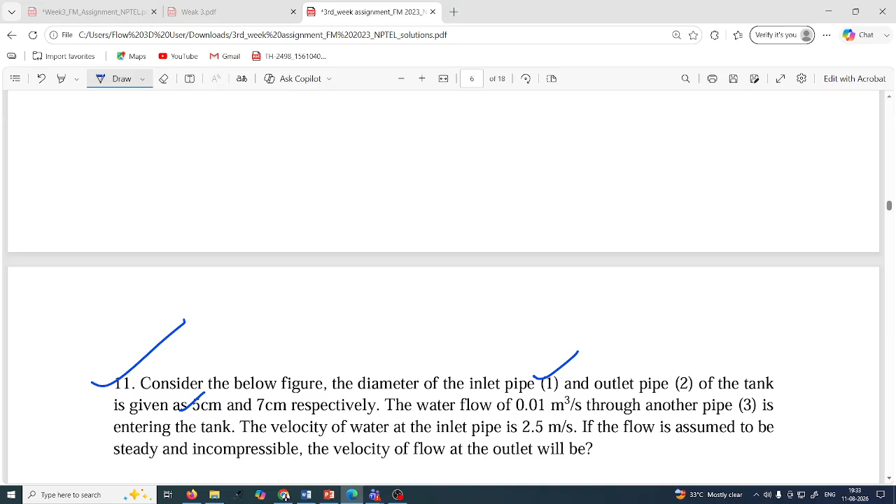Okay, so next question, let us move on to question number 11. Consider the figure below: the diameter of the inlet pipe 1 and outlet pipe 2 of the tank is 5 centimeter and 7 centimeter respectively. I think this is the same question as the previous one - yes, it is similar, so we will not discuss much.

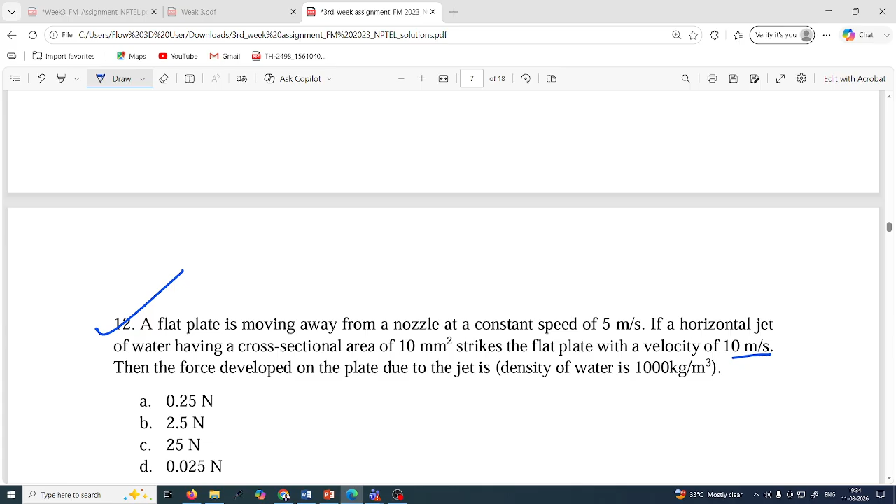Now the next question, question number 12. A flat plate is moving away from a nozzle at a constant speed of 5 meter per second. If the horizontal jet of water having cross-sectional area 10 mm square strikes the plate with a velocity of 10 meter per second, then the force developed on the plate due to the jet is - you can take the density of water as 1000 kg per meter cube. So what will be your answer for question number 12?

You can take 2-3 minutes for calculation purpose.

Question number 12, very important.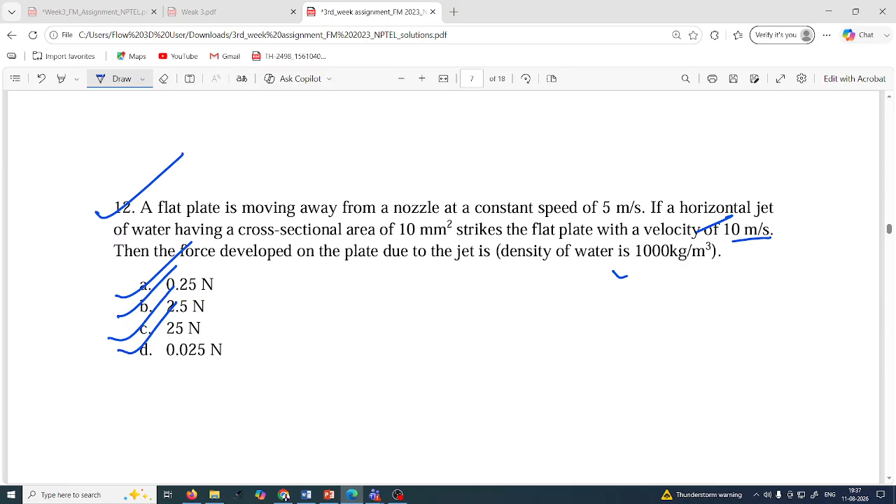So how we will calculate the force developed on the plate due to the jet is, here you have the formula rho A and V square, that is the relative velocity square, so V capital V minus small v. So here in the question it is given, 5 and another is 10. So 10 minus 5 we will get 5. So after the calculation you know very well the things.

So now let us move on to the next question.

So here the derivation is given. Let me just show you briefly. A horizontal jet of water with cross-sectional area Aj and velocity Vj strikes a plate moving away from the nozzle at constant velocity Vp. The force exerted by the jet on the plate is what we need to determine, and the density of water is rho.

So, assumption here, let us understand the assumption. The jet is incompressible and has a constant velocity Vj when it exits the nozzle. So this is the assumption.

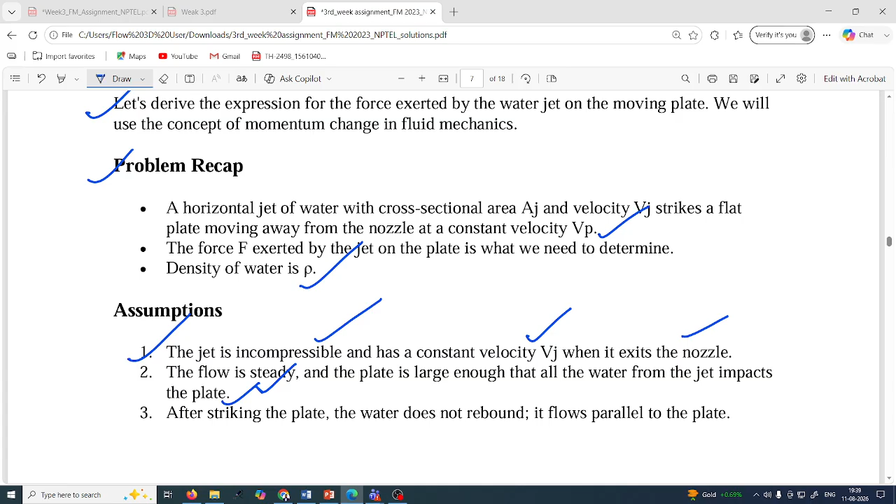The flow is steady, and the plate is large enough that all the water from the jet impacts the plate. So remember, there is no loss of water. After striking the plate, the water does not rebound, it flows parallel to the plate, not rebound, just flows parallel to the plate. So these are the assumptions.

So with this assumption, let us move. So define the relative velocity of the jet with respect to the plate. Remember please, the question may be framed from the assumptions, so remember always, these are very important.

So define the relative velocity of the jet with respect to the plate. The relative velocity of water jet as it strikes the plate is V relative equal to Vj minus Vp, you know very well. The relative velocity is crucial because it represents the speed at which water impacts the plate.

If let us suppose your plate is fixed, means what? The whole water velocity will impact this. If your plate is moving and the jet is also moving, so what will happen? So here you need to work with the relative velocity. Means if something is fixed, that will experience more force compared to if the plate is also moving. So we have to minus the things. Just remember how we will recall the concept of relative.

So always remember. Now, calculate the mass flow rate of the jet. So mass flow rate is nothing but rho A and Vj, area of the jet and the velocity of the jet and rho. So now, however, for the purpose of force calculation, we focus on the mass flow rate relative to the plate, which is given by mass relative is equal to V relative. Remember please, because you are focusing on both jet and plate moving.

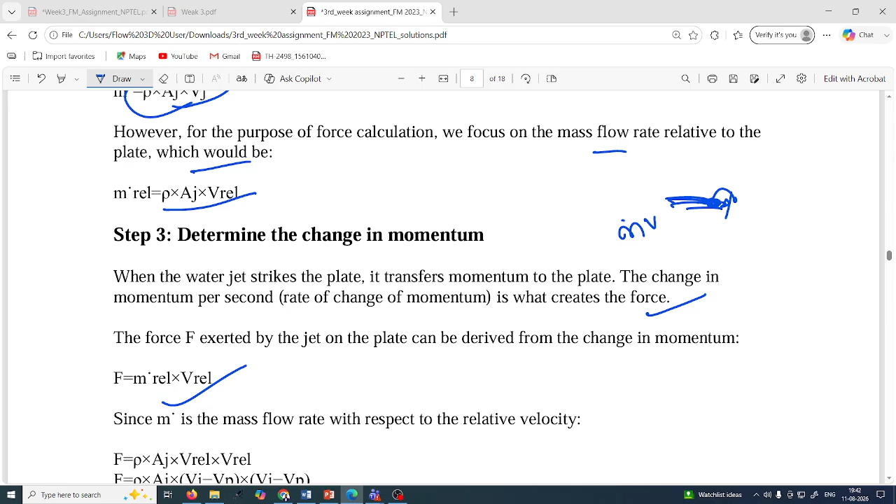So the similar concept here: mass relative and velocity relative, mass per second relative. Since m dot is the mass flow rate with respect to the relative velocity, F is equal to rho A velocity relative, and here this is your m dot and this is velocity, so m and Vj minus Vp, and this is also Vj minus Vp, so whole square, remember this.

So F is equal to area of jet, density of water, velocity of jet and velocity of plate. Sometimes you might be confused whether it's Vj minus Vp like that.

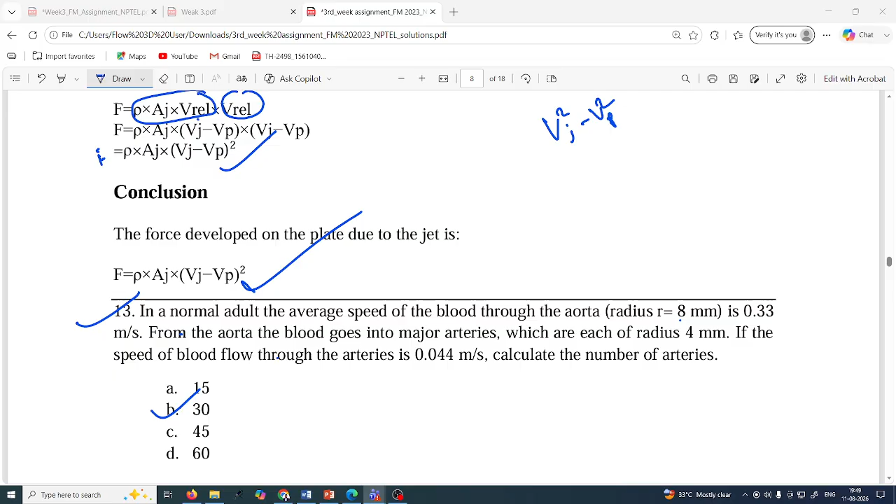Okay, so you are telling 30, meaning option B is correct for question number 13. Let me just see whether option B is correct or not. Yes, option B is correct. How? Very simple.

In a normal adult, the average speed of the blood through the aorta is 0.33 meter per second. From the aorta, the blood goes into the major arteries, which are each of radius 4 mm. If the speed of blood flow through the arteries is 0.044 meter per second, calculate the number of arteries.

So here, number of arteries means what? Just try to understand. Let us suppose mass flow rate from your aorta is equal to mass flow rate from the arteries.

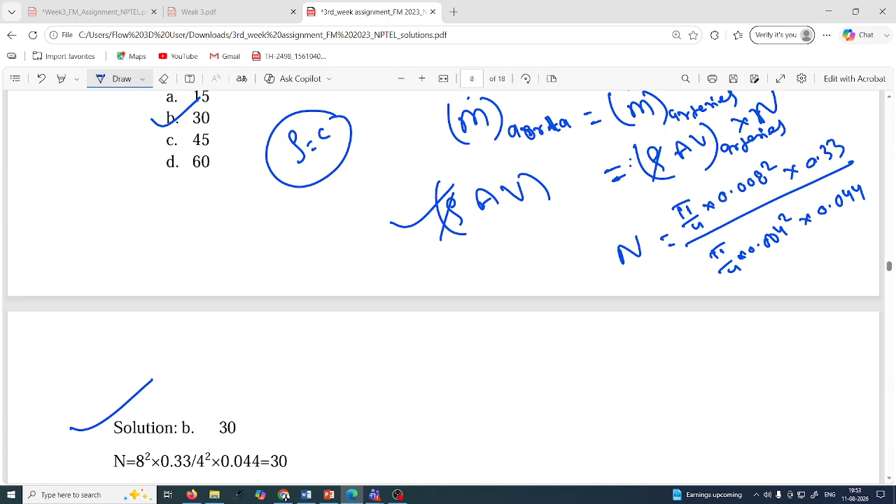When you calculate all this, you'll get the answer - here both are in mm so those units cancel out, no issue. Finally you get 30. Very conceptual question, but you need to remember how to apply the concepts.

Now the next question. A circular jet of water emanating from a nozzle strikes a stationary vertical plate normally.

A stationary vertical plate - your plate here, remember please, means fixed. The force exerted is measured as 635 Newton. If the discharge from the nozzle is measured as 42.4 liter per second, estimate the diameter of the nozzle at the exit, in centimeters.

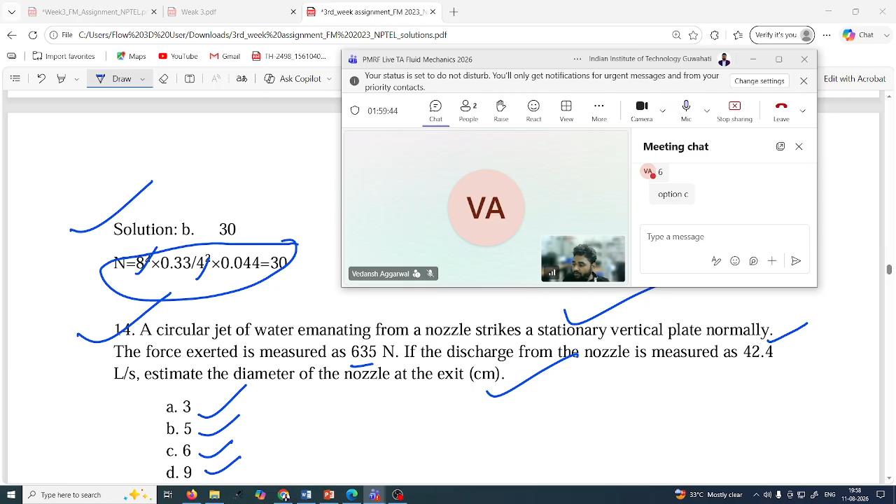So how is it 6? Let me just explain whether it is 6 or not. Option C is correct. So you are also correct.

A circular jet of water from a nozzle strikes a stationary vertical plate. The force exerted, whatever you get, is mass into velocity, that is mass flow rate into velocity. Mass flow rate is nothing but rho av. This value is 635. If the discharge from the nozzle is 42.4, discharge is nothing but velocity, discharge by area, so here you can write rho a into discharge by area into discharge by area.

So estimate the diameter of the nozzle. From here, A is nothing but pi by 4 d square, this is area. So one A will cancel out and another A will remain here. So this A will be pi by 4 into d square. You can write very easily.

Rho is your water, so you can write 1000 into discharge, which is given as 42.4 liter per second, meaning 0.0424, square divided by area, so pi by 4 into d square, and this value will be 635. From here you can calculate, one unknown is there, so calculate easily. So d square will be, and finally d will be 6 centimeter. So remember.

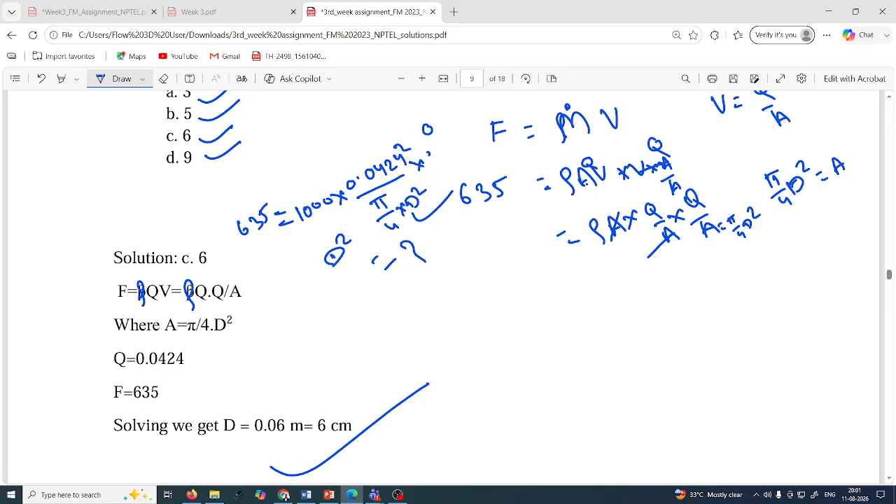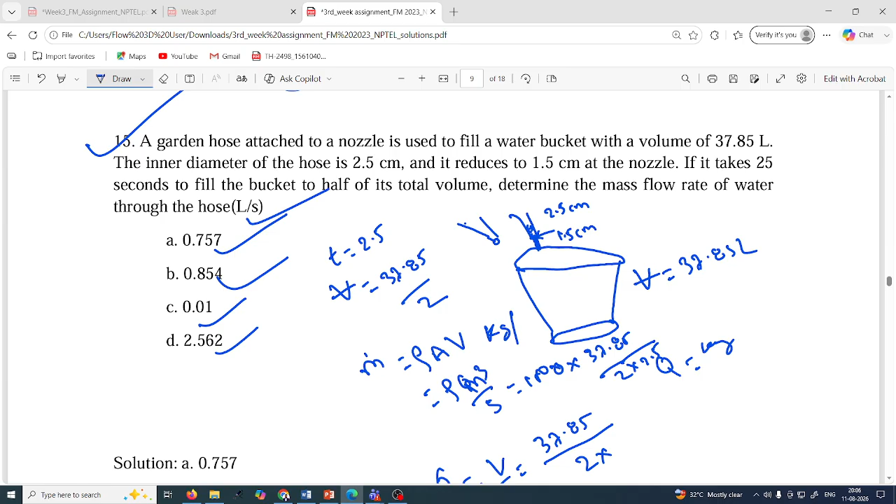The question is asking in liter per second, not in kg per second. This gives you kg per second, but the question is asking liter per second. So very easy, again volume by time. So this is your volume 37.85 divided by half volume in how much second, the second given is 25 second, not 2.5, here it is 25. So we calculate, you will get 0.757 liter per second. If the question was asking in kg per second, you multiply with rho to get kg per second. Here you will get the answer directly in liter per second.